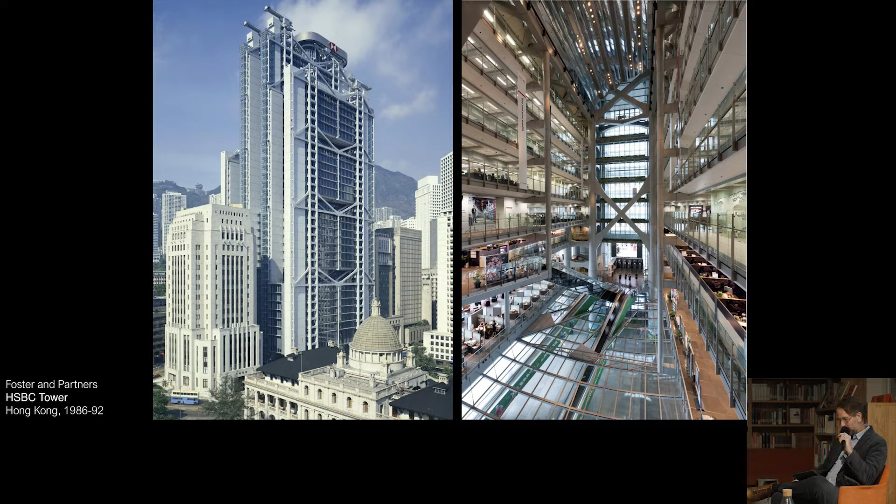I'm going to talk from a perspective that suggests that what we have come to call sustainable architecture, and this is my emblematic sustainable building, is now a thing of the past. A failed project that, much like the COP climate negotiations just concluded in Egypt, served to barely impact the rise of climate emissions. Since, as many of us know, sustainable or green architecture emerged in the 1980s, carbon emissions from buildings have of course continued to increase at a fast pace. Evidence that sustainability is not enough.

Or as Sarah El Battouty, an architect recently appointed as the UN's Race to Zero ambassador, noted yesterday in an interview relative to the COP conference, despite the good intentions of many architects, as she put it, quote, "Too often we create a silly building design and then put some solar panels on top and call it green architecture," unquote.

We know this general phenomenon, right? Another UN representative, the geoscientist Yamina Saheb, puts it a bit differently, as she wrote relative to a UN report from April, quote, "The building industry is lagging behind all other sectors. It hasn't modernized at all since the Second World War," unquote.

And what she means by modernized there is not our kind of architectural terms for modernity, but rather that we are still operating with a template of steel, concrete, and glass, and a sealed interior, as we'll talk about quite a bit today, that began to develop right after World War II. So that these design methods and material supply chains have become so deeply embedded in what we call architecture that it appears quite difficult to kind of move past them, right?

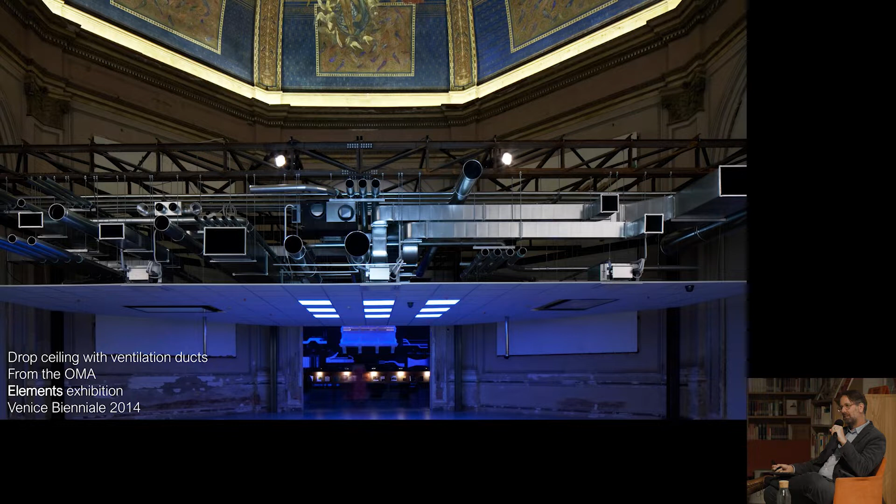So what I'm trying to start to put together is the terms and the concepts and the histories that can help us to construct this new vision or this alternate proposal for architecture that talks about sufficiency, that engages with some of these questions, and that thinks then about how to do more with less, right? Another way that the UN talks about sufficiency is with the phrase demand management, right? That we just don't need as much as we think we do. So these are all things to keep in mind. Air conditioning is at the center of this challenge.

Can you see the slides okay? The light isn't? Okay.

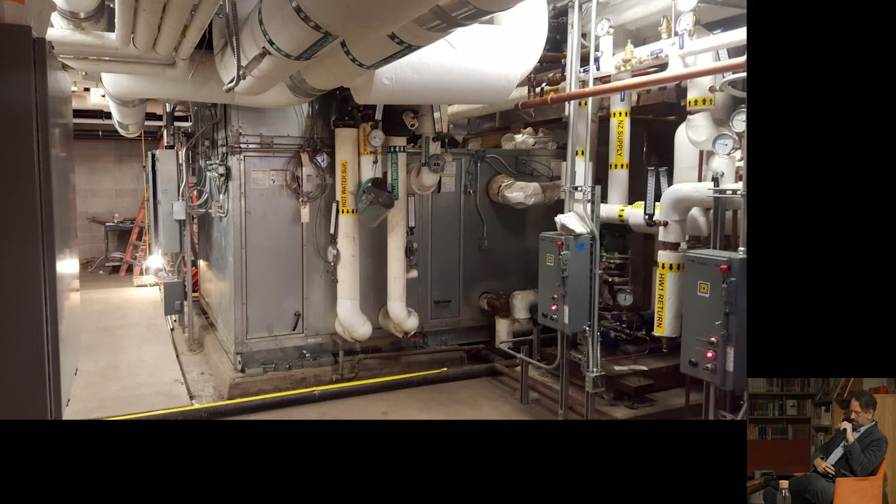Air conditioning is at the center of this challenge and of the transformation to come. Air conditioning, as the philosopher Peter Sloterdijk puts it, quote, in the literal sense, will establish itself as the main space political theme of the coming era, which is to say of our era today.

Air conditioning and HVAC, heating, ventilation, and air conditioning more generally, has been a primary target of the efficiency trajectory. Through HVAC, we have filled our interiors with fossil fuels. Buildings have become systems for processing energy resources as those resources are drawn out of the soil, processed and burned to power mechanical conditioning systems.

And the supply chains and technological trajectories shepherded by HVAC, in particular the sealed high-rise office tower developed in the US in the 1950s and then of course spread widely around the world, and the mechanical provision of comfort on which it relies, has been this kind of template.

So in this sense, air conditioning has produced, or at least contributed to the production of, a world of comfort and consistency at great cost. The thermal comfort generated inside has, through the carbon emissions from these HVAC systems, degraded the prospects for life outside. And this is, again, just one of many possible examples. Of course, an important one to the history of the field.

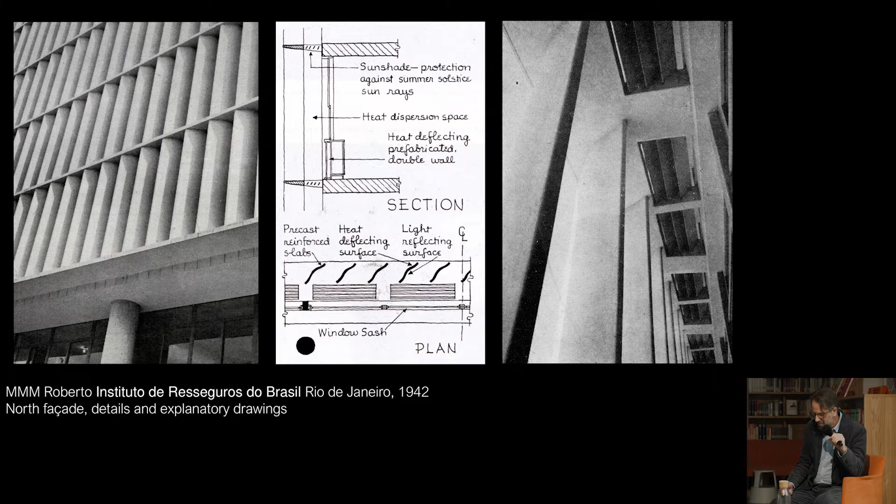The historian and curator Barry Bergdoll, in the context of the 2015 exhibition that he curated at New York's Museum of Modern Art called Latin America in Construction, wrote that the emergence of a distinctly South American modernism, and we'll see many more examples in a moment, involved projects and buildings that, quote, are not the belated reflections of examples set in Europe, but previsions of a modernization to come, end quote.

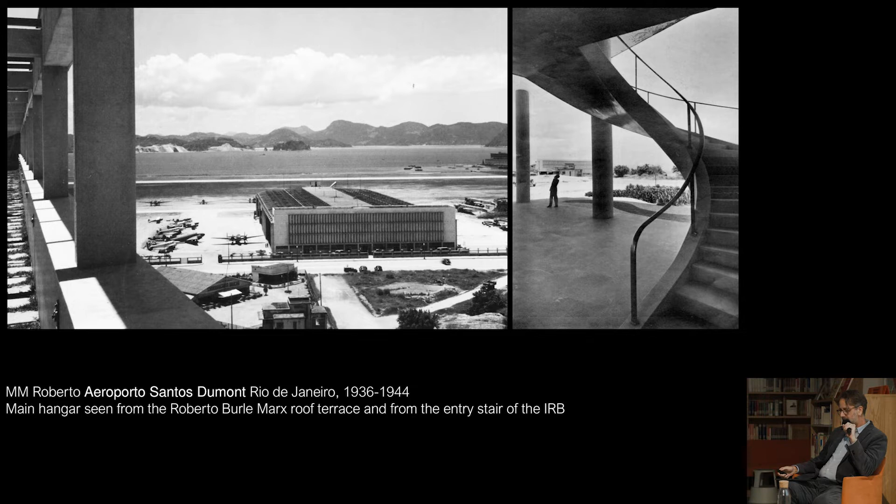A premise which, it is worth noting, and which Bergdoll himself notes, has been a part of Brazilian written histories for decades, which is to say, histories of modern architecture written in Brazil have noted the importance of Brazil as a site for the emergence of ideas rather than receiving them, let's say, from France. We'll get into that again in a second, too. Yet Bergdoll's precise articulation helps us tease something out here today. Brazil, again, was a site of emergence, of production, more than a site for reception of modern architectural ideas. The arrow of history moves from south to north, or at least is somewhat circular.

Also significant, this inversion of cause and effect places climate and the elaboration of design methods to manage the thermal interior as essential to narrative conceptions of the progressive development of modernism, right? So when we place Brazil as a kind of originary space rather than a receptive space, these questions of climate become more essential. We could draw this notion of architecture as a practice for climatic adaptability back to the heart of the matter, so to speak, the heart of the history of modern architecture, to provisionally reclaim Le Corbusier on these terms.

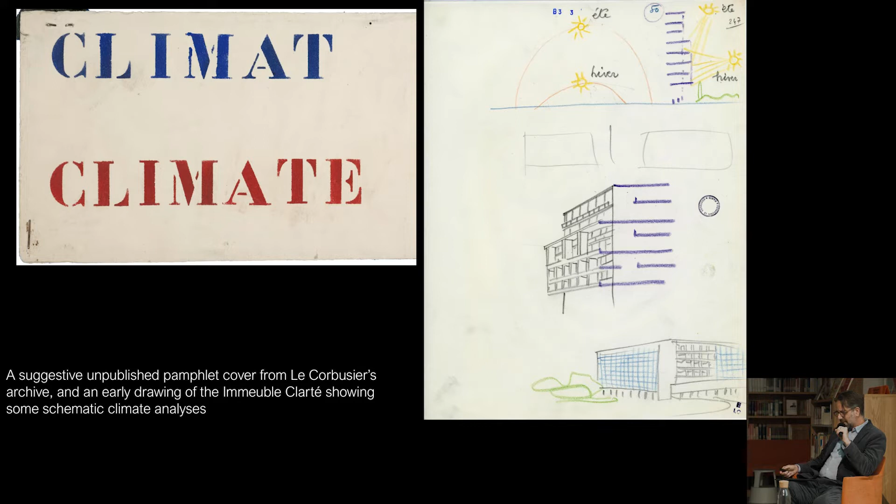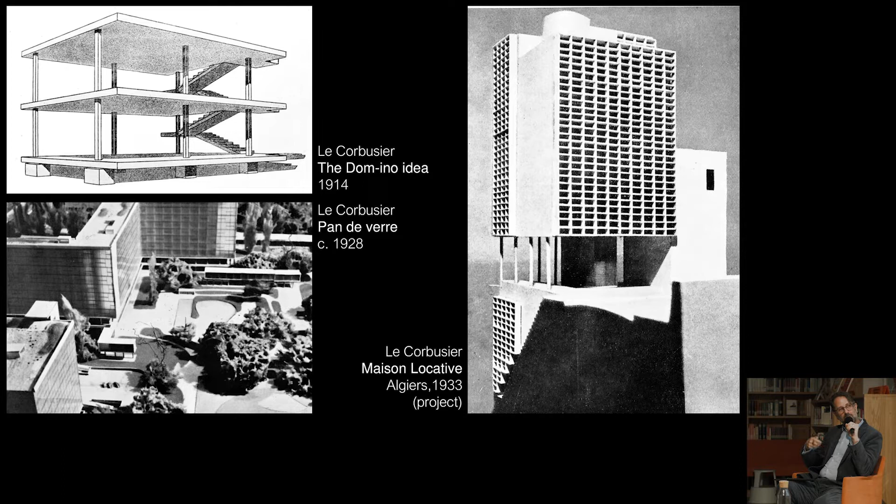In the Barcelona example, banks of operable shading louvers sit on the facade of compact townhouses. The sectional drawing on the left suggests a different sort of originary moment of modern architecture, not so much a template to be followed as one that was itself received, influenced by experiments in Brazil and elsewhere. The louver system that we see in this later model, a model built for an exhibition in 2002, we see in this drawing from 1933 represented as having these different states of rest.

Right now, this seems like a kind of silly thing to focus on, right? It's not that complicated, it's pretty straightforward, but it's this first moment of this kind of representation, right? A kind of mediatic event, if you will, a representation of the potential of this dynamic facade. I'm indicating perhaps that one of the projects of design was to produce a felicitous relationship to climate patterns.

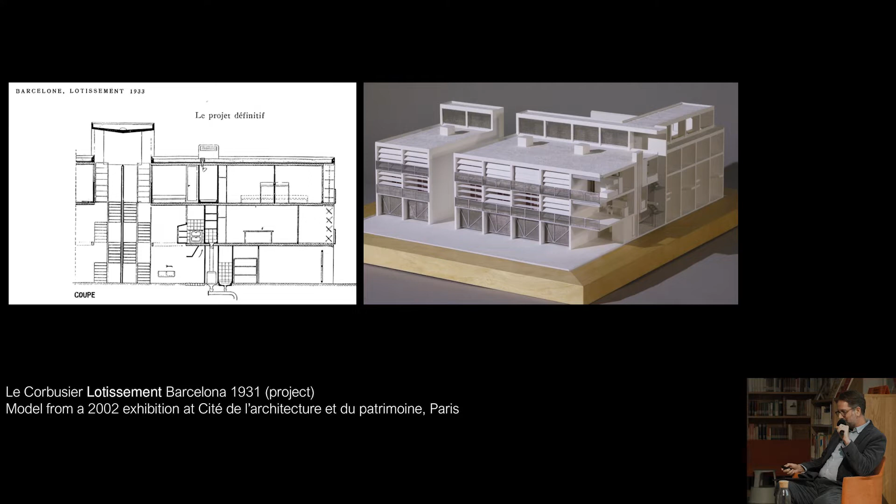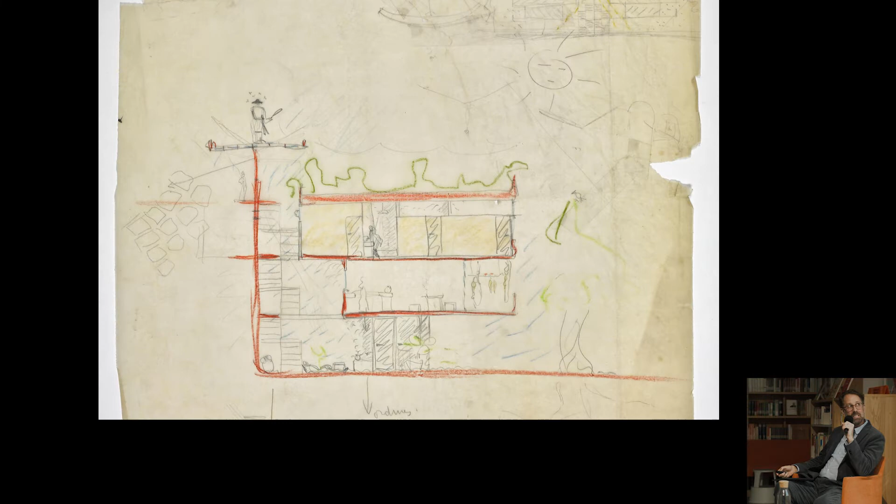We can also take a look for a second at this image, another drawing of the same project, right? We can see the same basic section, but drawn somewhat differently, which is interesting for us not only because it suggests the flow of air through the building, right? We see these blue lines. We now have all the red and blue and purple arrows, right? But this was just blue lines. So another kind of media event, an attempt to show how air moved through the building. And it has this slightly passive sun, right? Not quite sure what to make of that. It seems, I guess, resting.

But I think most importantly, this strange fellow here, right, who I was thinking was beekeeping for a while, but I think it's probably butterfly catching, right? So walking along the lantern roof of this building that also, as we note, has proposed a quite lively green facade, suggesting the important role of these speculative drawings, again, also of architectural media, in considering and previsioning, right, premediating, back to Grusin's term, future modes of life.

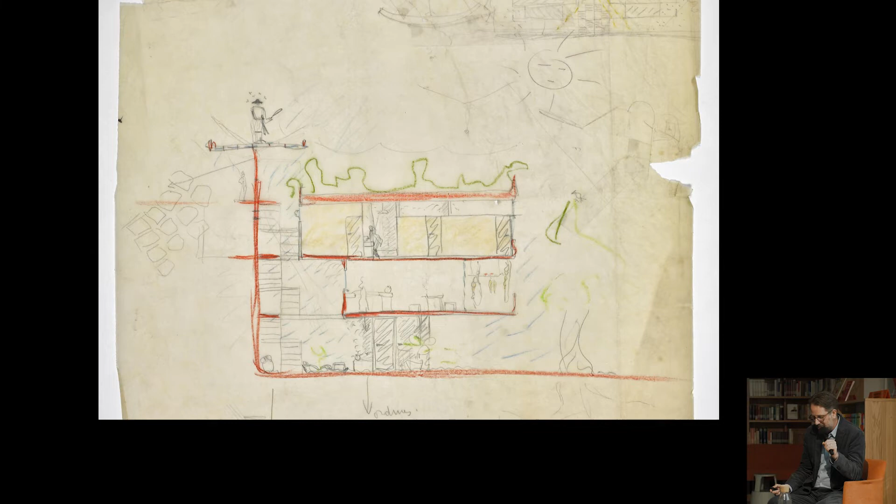Which is to say that l'esprit nouveau that underlay much of Le Corbusier's work in this period was a new spirit enacting a different relationship between society and nature, between inside and outside, with the dynamic shaded facade as an essential mediating system. So to jump back for a second to this slide, what might have looked like garages are in fact these indoor-outdoor spaces, much like the jardin suspendu that Corb would specify in other contexts, that allow for the street, replete with trees and plantings, to embody this novel social form, right, to be this new spirit.

In this sense, architecture was seen to have a capacity to reimagine, to re-script relationships between social practices and climate patterns, to be a modulating and mitigating device that provided a space of comfort.

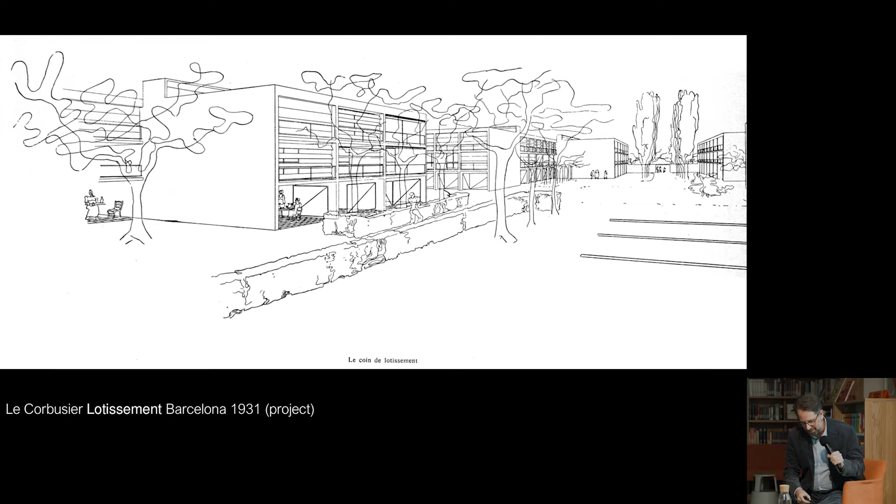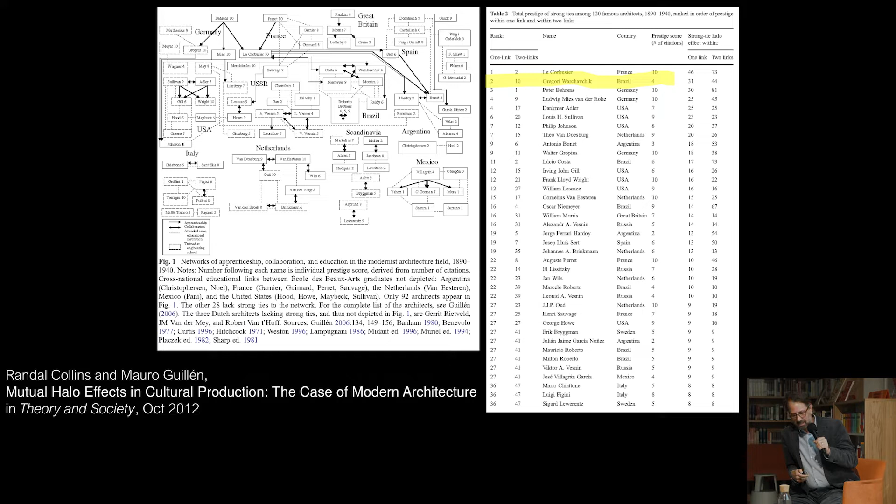Okay, I think I'm going to skip this next part, but it basically just shows that Georgi Warchavchik, who was a Ukrainian, Italian, Brazilian architect, right, as happens sometimes, was one of the most well-published in the period up until about 1940. This is his important house from 1927. Just a quick indication of the relative importance of Brazil to the broader sort of dissemination of modern architectural ideas that I'd be happy to get into some details, but I've already spent too much time on it.

Okay, so to continue our story in Brazil, the details of the siting and facade treatment of the IRB building in Rio were informed by a related effort towards increasing scientific knowledge of the Brazilian territory, especially its climate. The new National Institute of Technology examined climate patterns to consider their effects on the population. Buildings, again here, were an essential medium, right? The primary means through which emergent knowledge of the natural sciences, of meteorological systems, of climate patterns, buildings were the site where that knowledge could be applied, intended to improve social well-being.

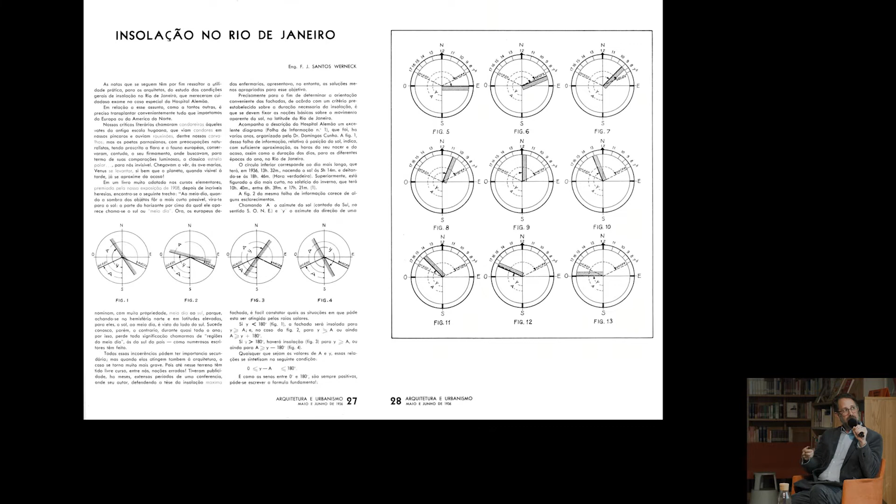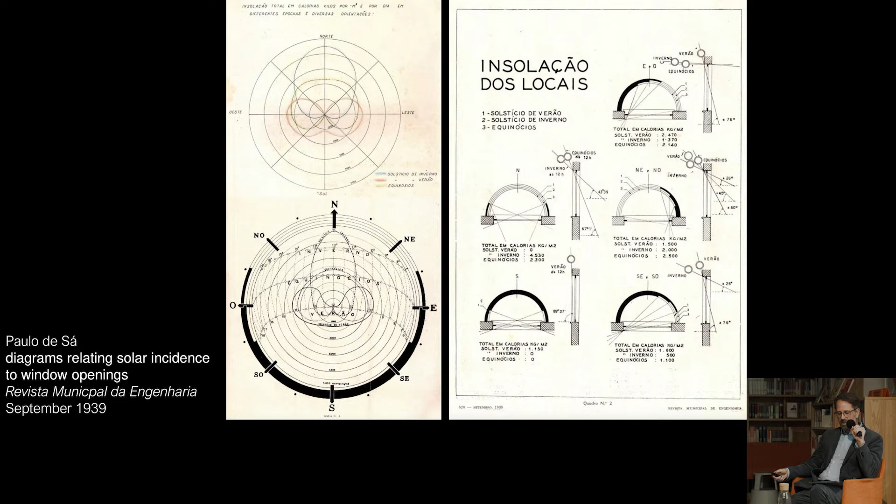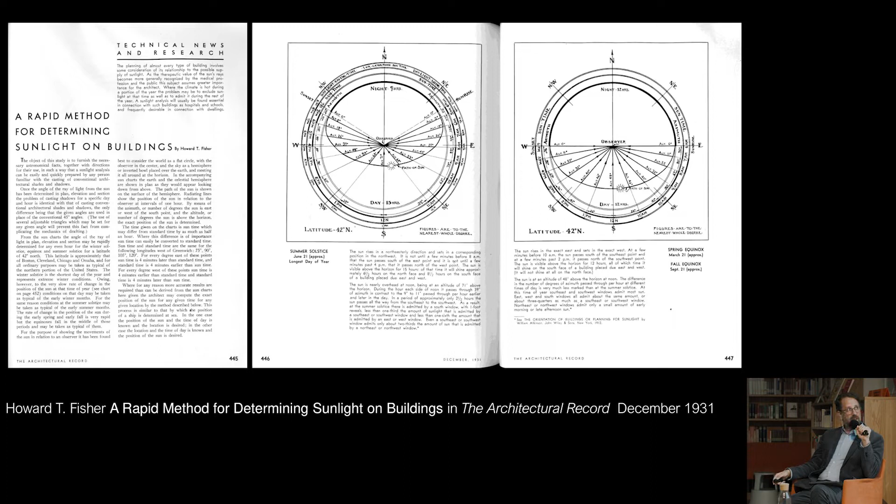This emergence, these types of drawings were not unique to Brazil, right? It's a really rich archive of drawings of these Brazilian engineers, but this was certainly not unique to Brazil. Here, a version from the American journal Architectural Record, where similar experiments were playing out at the Royal Institute of British Architects, at the Massachusetts Institute of Technology, and elsewhere, perhaps even here in Poland. Again, just some hints of how these experiments in Brazil resonated across and reflected discussions in the period, previsions again of a modernization already in development.

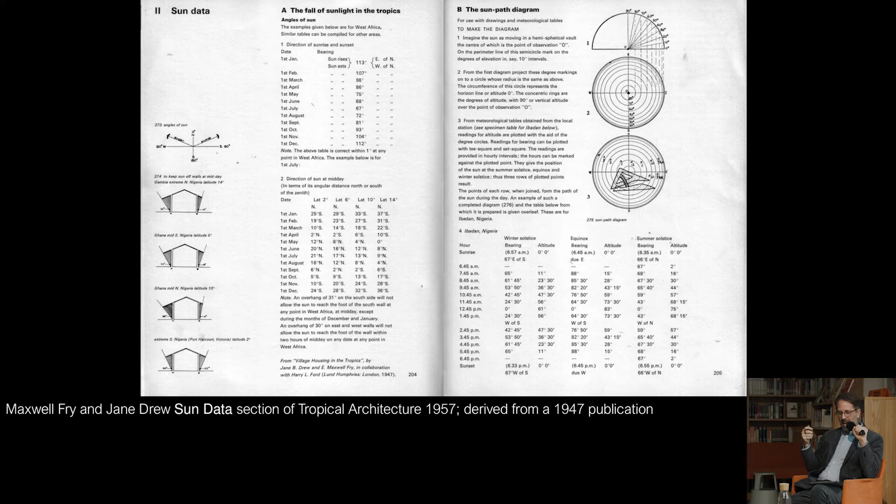Here, another version of solar analyses on the right, reproduced by Maxwell Fry and Jane Drew, opening towards images resonant with what the media theorist Vilém Flusser refers to as technical images, right? A type of media that is infused with new data and scientific approaches that is also caught up in ideas and new desires about how this knowledge influences the way that we live.

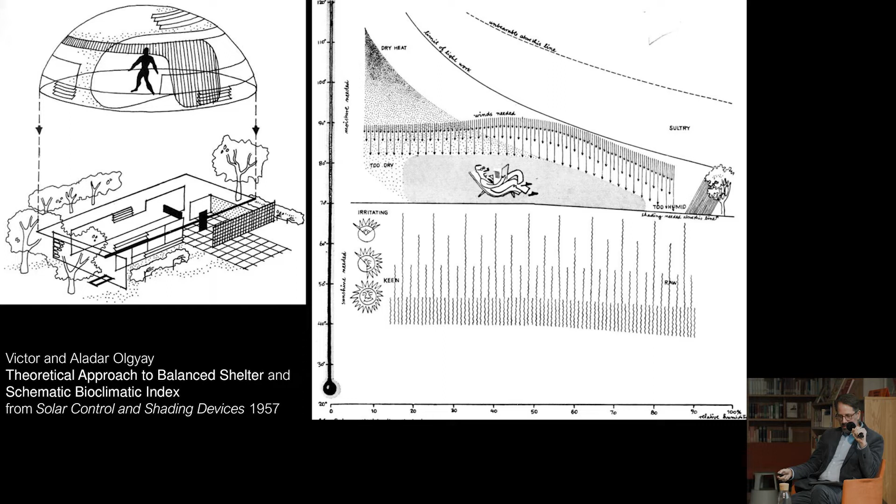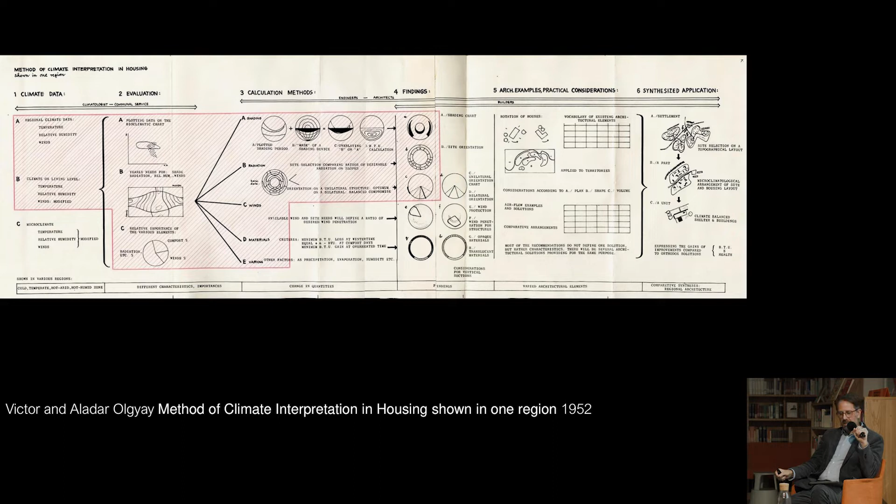In the book on which tonight's talk is based, I talk about their work at much greater length, pursuing the Olgyay brothers' elaboration of mid-century climate diagrams and their framework for climate modeling as a sort of precursor, a sort of just before digital version of climate management and performance techniques. And I'd be happy to provide details in questions.

Back to Brazil again, and to the IRB. Here we have another useful early example of a technical image infused with both data and desire. We looked before at the north facade. Here is an image of the south and east facade, with a diagram drawn by Milton Roberto to explain the architect's thinking. We can see in the photograph the general approach, alternating bands of glazing and concrete.

As Milton writes in this diagram here, the exterior walls could have been all glass, quote, very modern, of course, but due to sun and much light in Rio, and thanks indeed to the scientific computing done with data, end quote, so that's kind of the state of the discourse, by Paulo Sá, those images we just saw, the science basically said that it should be this sort of rectangular centered window shape, right? However, Milton Roberto continues, architecture culture suggested otherwise, as he writes, quote, everybody knows since Louis Sullivan that a horizontal window is preferred, the advantages of a window with full horizontal development, as he puts it. The results, he writes, come and take a look.

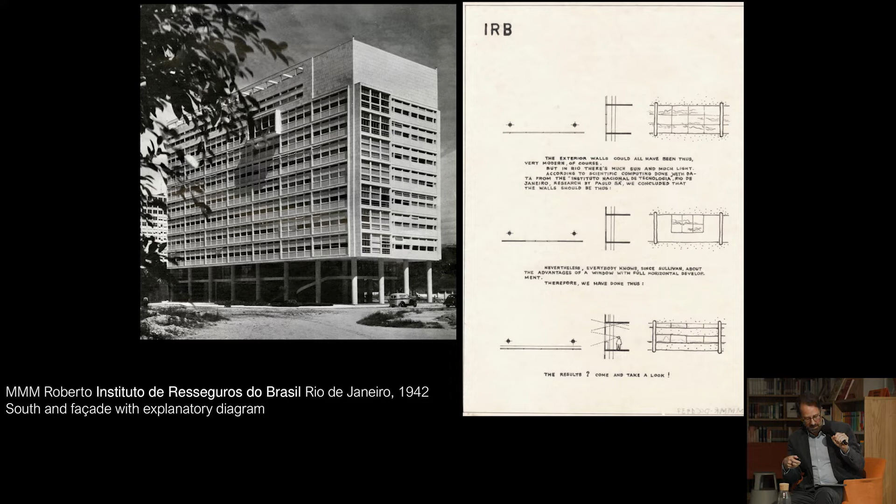Okay. So here the relative impact of this approach on the interior, aided by internal shades. Now, this artifact is on a continuum with some of those seemingly more technical images I've just clicked through. It is less an analytic image aiming to determine the ideal design according to climatic parameters, and more a sort of post hoc justification, right, intended for the client, for publication.

While a bit feeble as an argument for climatic modernity, it helps to clarify, I hope, that climate data was being brought into design methods on architectural terms, right? This is the kind of Louis Sullivan bit. As an intervention in form and facade design, as an aspect of discourse, as part of emergent and transforming architectural culture. So the social role of modern architecture was, at least in part, to adapt a building to this climatic condition.

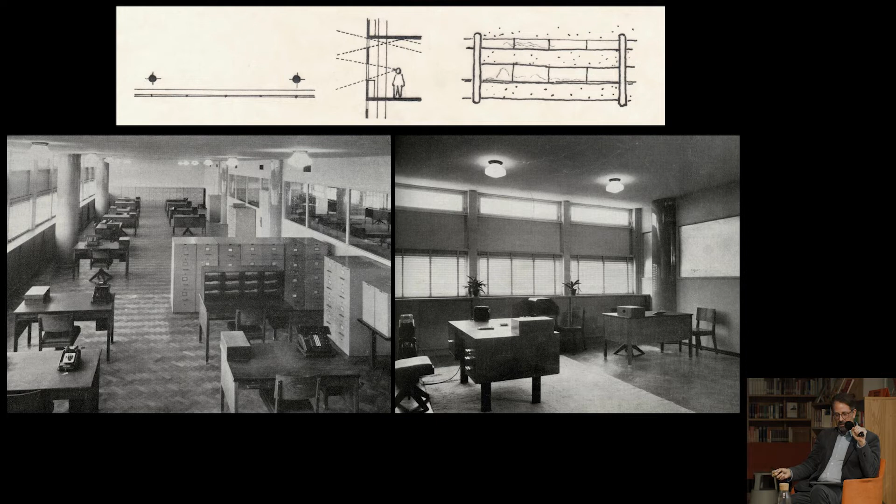From this foundation, we can start to take a look at the emergence of a certain sector of climate modernism, to start to build up the database, so to speak, the many different ways that facade treatments sought to alter the experience of the interior, to place the thermal interior in a different sort of relationship with the regional climate. A sense of the ways in which a certain type of design practice was deployed to adjust these relationships. Architecture, that is, again, as a means to sort of operate on this socio-ecological nexus.

One thing that some of you may have noticed in reference back to Le Corbusier's Barcelona project is that the shading devices at the IRB that we were looking at were fixed rather than dynamic, right? The same firm, the Roberto brothers, built this speculative office building, again intended for occupation by insurance agencies, seguradoras, right? It was called the Edificio Seguradoras, in downtown Rio a bit later in 1949.

An important piece of evidence, we can see the differently treated facades, right? The sun-exposed facade having this elaborate shading system. And on that facade, a few different systems for adjustment. We have this set of wood louvers that are adjusted by this mechanism here, shown again here in a different sort of state of rest, right? We have also these vertical, I'm sorry, these horizontal shading systems, and then also this capacity to ventilate some of the heat that might have otherwise collected below.

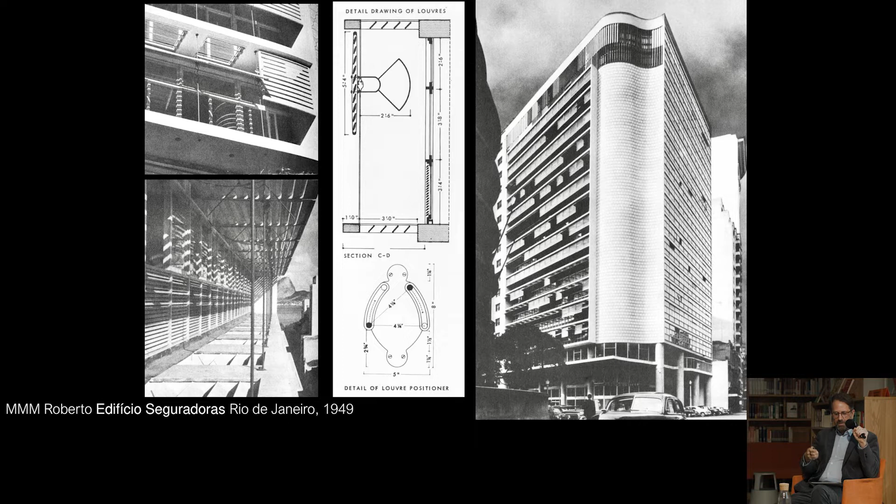Paulo Ribeiro's speculative office building in Salvador da Bahia, further north in Brazil, had a very simple system of 2 layers of wooden slatted screens, a movable horizontal version at the interior layer, and then a fixed vertical screen at the exterior, right? So you could sort of adjust the overall blocking out of radiation accordingly.

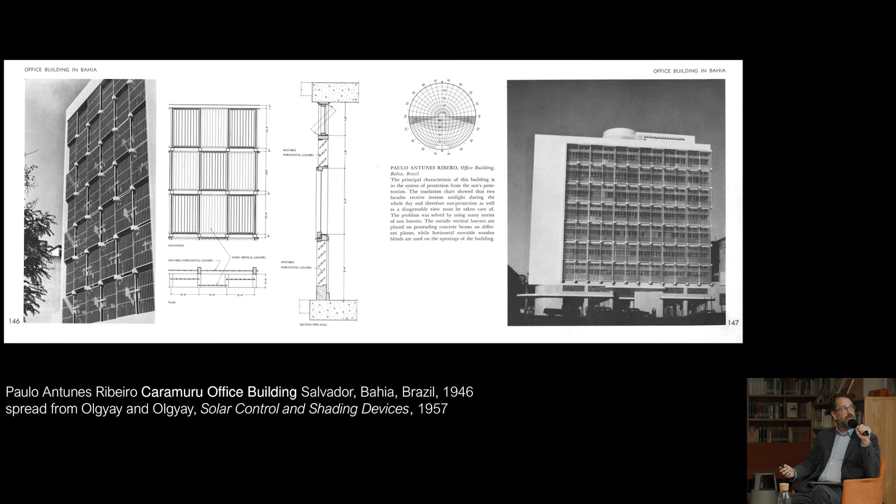Back in Rio, the Roberto brothers again designed this speculative office building on a relatively straightforward light metal shading system, easily manipulable as they're very directly demonstrating, right? So again, this kind of sense of here's how you do it, right? Come take a look. Again, we can note the importance of this image, right, and its claims to the progressive premise of their practice. An interesting note also, right, the kind of built condition that surrounds it, which was certainly of a very different period.

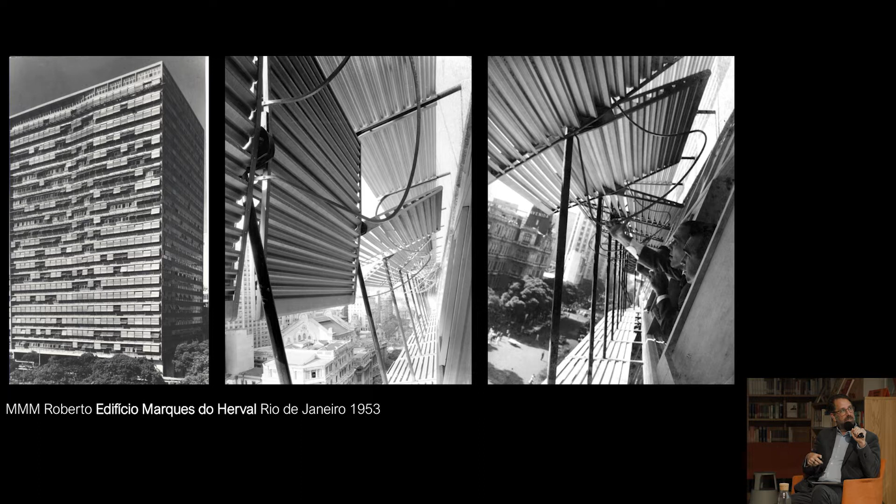Another Roberto brothers project that I'll spend a little time on in the conclusion, a small residential building on the then in development Copacabana Beach, built for their own occupation, the Edificio Mamãe, the building for my mother, so kind of before Venturi, right? Not that that really matters. The Edificio Mamãe, built on then in development Copacabana Beach, also clarifies an essential point, right?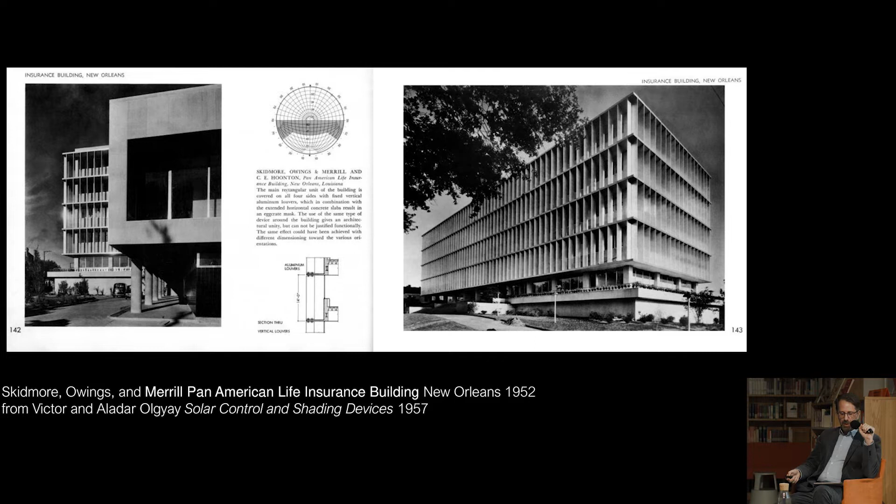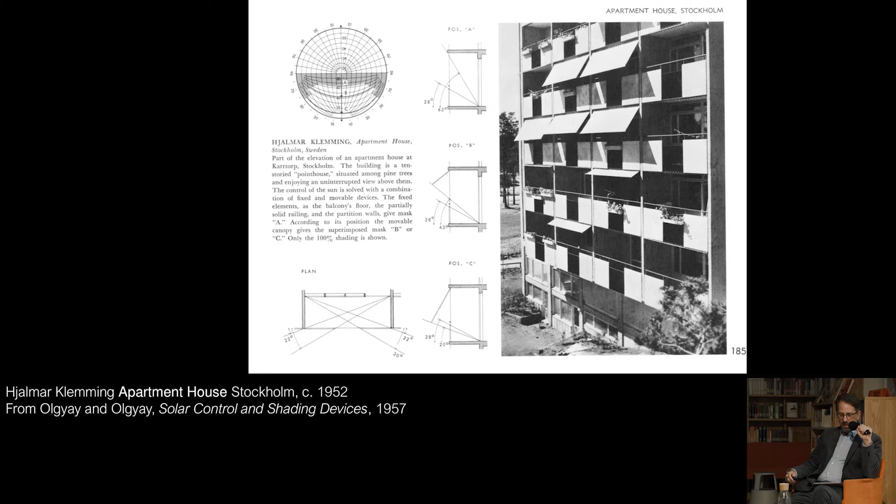There were many others with either fixed or dynamic shades in Brazil and elsewhere, built and unbuilt, suggesting a broad effort of architects, engineers, and others in a context both geopolitical and geophysical that led in this period to the globalization of the international style, right? Which is to say, modern architecture was able to become a global phenomenon by virtue of the shading device of the brise-soleil. Each building here not only brings its own set of design drivers, but also provides evidence of different aspects of climate knowledge and different socio-political contexts, as here this unbuilt headquarters for the Bahrain Petroleum Company.

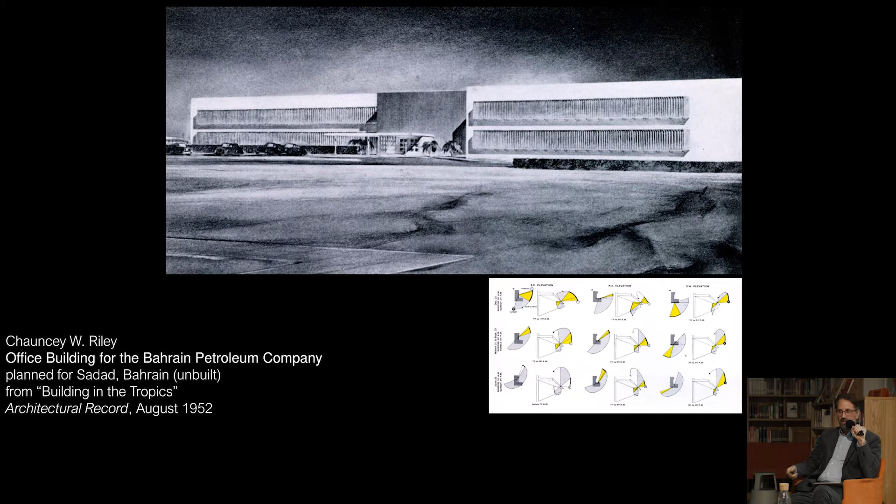Okay, and this is just a smidgen, a few examples of a very broad database, again, that's elaborated in the book that allows for us to get a sense of this broader array of climatic modernism. But one more Brazilian building, a better known example of architecture as a practice of climatic adaptability that allows me to clarify a few things and then move towards a concluding piece, right?

Likely the most famous of Brazilian shaded modernism is the Ministry of Education and Health, I assume known to some of you, if perhaps only from your survey courses in university. A building designed by Lúcio Costa with a young Oscar Niemeyer and a team of architects and engineers. I'm not going to get into the debates around whether Corb was involved, but we can talk about that at the end. He wasn't, basically, is the solution there.

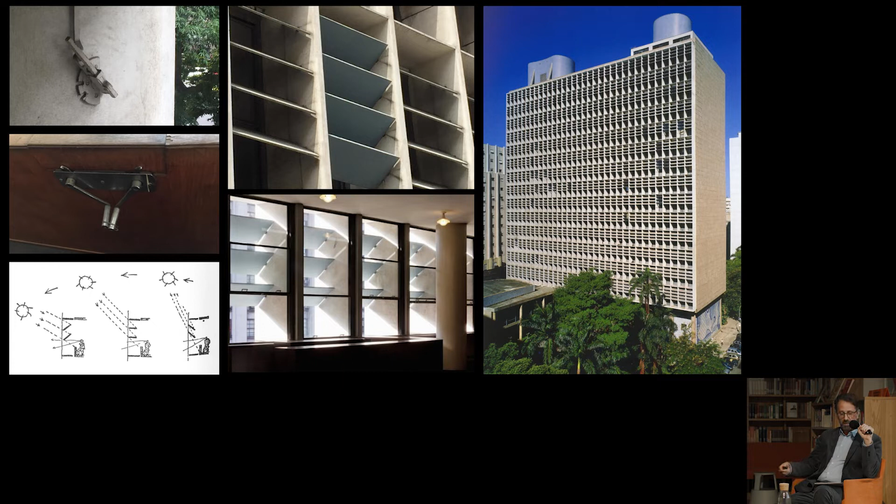The sun-exposed facade, again, the north facade in the global south, contains an egg crate system, each module filled with a bank of 4 adjustable louvers. We can see the louver adjustment system here on the left. It wasn't working when I visited in 2015, but it's since been repaired. And on the bottom left here, Costa's well-known technical image, right, showing how the louver system adjusted according to the daily path of the sun. And this was really more about daylight in many ways than thermal conditions, which this little dot here is the light going on, right? So this is part of this indication that at certain times of day you had to flip the switch, right?

But here's the important thing to note. The facade treatment of the ministry building was not only about shading per se, the direct daylighting and thermal effects on the interior, but also about the presentation of modernity, right? As Milton Roberto sketched it out relative to the IRB, come and take a look, right? Look at what we can do in this new context, a government building that sought to demonstrate on the facade for all to see the seemingly progressive economic and social principles of then President Getúlio Vargas's so-called Estado Novo.

I'm not going to get in today to some of the vagaries of that either, which is to say that this was, in fact, what was referred to as a benevolent dictatorship, right? A sort of authoritarian regime that sought to improve the well-being of the Brazilian population. But buildings such as this, this kind of facade demonstrating a certain type of modernity, were essential to the public relations of that regime. The Ministry of Education and Health was, in other words, both symbolic and material.

And we can then recast the insurance buildings and speculative office buildings we have reviewed as designs that saw in the climate dynamism of the facade an opportunity to intensify flows of capital, quite explicitly in many cases. Mechanisms of insurance, as we've seen, reinsurance, spaces for agents of global commerce, interior spaces conditioned, relatively, by non-mechanical means as part of a broader intensification and exploitation of resources and labor in Brazil.

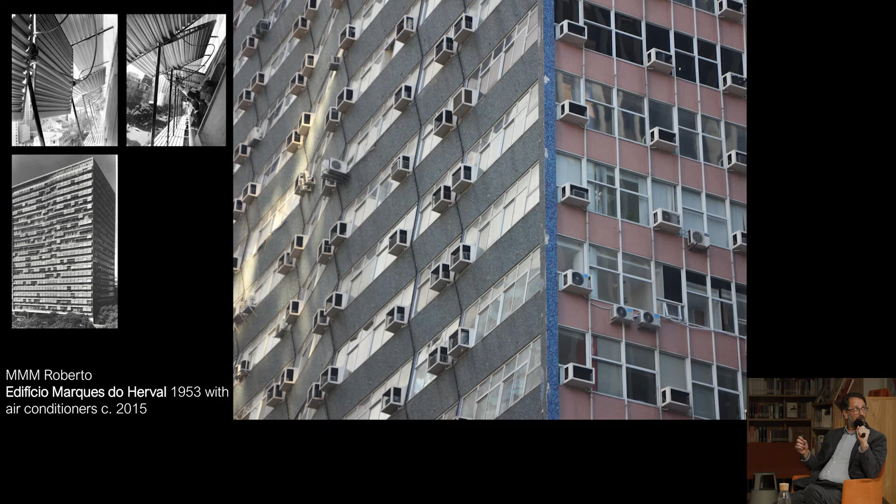Okay, so to return briefly to the comment from Barry Bergdoll, his suggestion that Brazilian experiments were not reflections of European models, but rather previsions of a modernization to come, we've seen this to be true in a few ways. In the dissemination of climate design strategies around the world, in the complications of architecture and neo-colonial corporate extractivism, in the dissemination of images and in the elaboration of specific techniques. But the modernization that came following these previsions, as we know, was not that of climatic design dynamism.

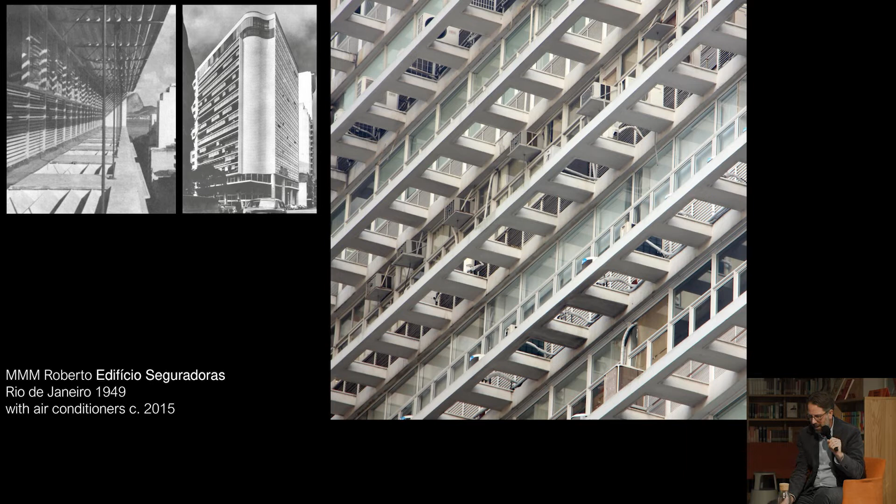Across the 1980s, many of the buildings in Rio, in Lagos, and elsewhere had their shading devices removed, replaced with carbon-costly in-window air conditioning units. And this one, in my mind, is the most atrocious: this delicate and very careful set of shading systems stripped away, but then served as the support system for coolers sitting on the ledge there. So almost in their face.

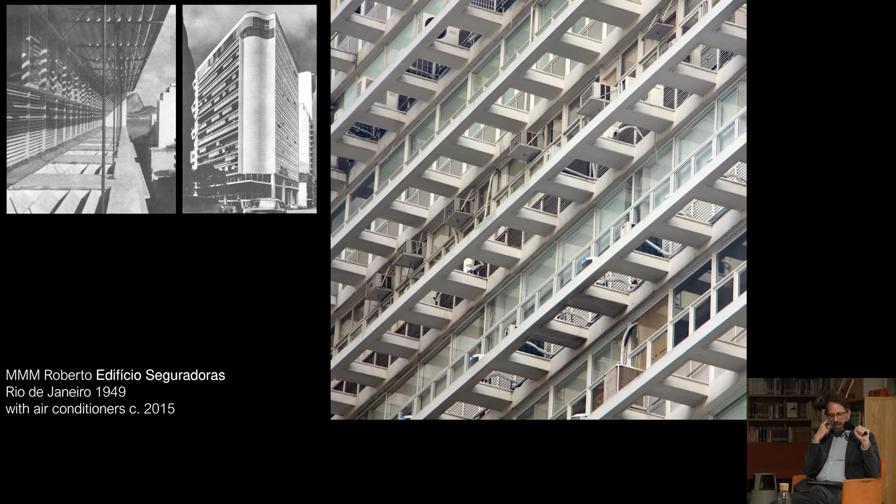So climate buildings, as much as any others, were part of this system. There's no outside to the global fossil fuel regime. And so what we see is that they pushed some of the edges and tried to produce alternatives, but often collapsed back into serving the purpose of their clients, of their inhabitants. All the same, having said all that, these thermal practices from the 1940s offer a potent recognition of the vagaries of historical change.

Evidence from a period just before air conditioning, in other words, can help us to think about architecture just after air conditioning, which is to say, today, hopefully. Especially insofar as these entanglements between climate and capital also emphasize the challenges of reducing carbon in a global economy that is still reliant on growth. We return to the premise of sufficiency, of demand management, of a framework for architecture that emphasizes the interconnection of design practice with climate governance and social habits.

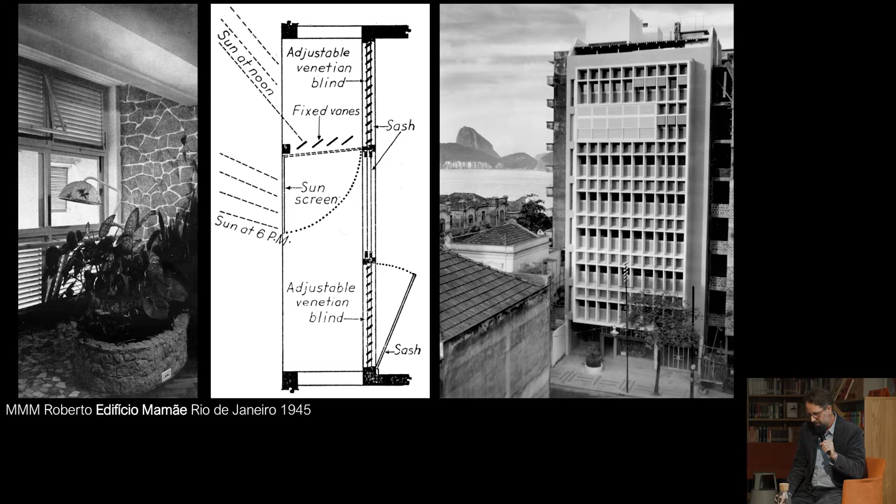This sort of form of embodied climatic engagement, right, that again we can think of in terms of this almost script or choreography that allows you to walk through the day and engage this facade on different terms. For contrast, we can place this project next to a contemporaneous one, the Equitable Insurance Building in Portland, Oregon, designed by Pietro Belluschi, completed in 1947, and generally regarded as the first curtain wall, fully sealed building. There's some debate, but we'll leave it at that.

The first building, that is, with a fully sealed facade such that an interior conditioning system was required for habitation, right? You couldn't open the window. You couldn't do anything else but adjust that HVAC system. The governance aspect at stake was the provision of as much energy as possible.

This building emerged in the Pacific Northwest, which is also the site of the Boeing airplane factory, basically, right? Energy systems had been ratcheted up for the war, mostly hydroelectric power, but also fossil fuels to feed the Boeing factory. And after the war, the question was, what do we do with all this energy? And Belluschi talks very explicitly about using the building as a solution to absorb some of that power, right? So this kind of governance provision that says use as much energy as possible.

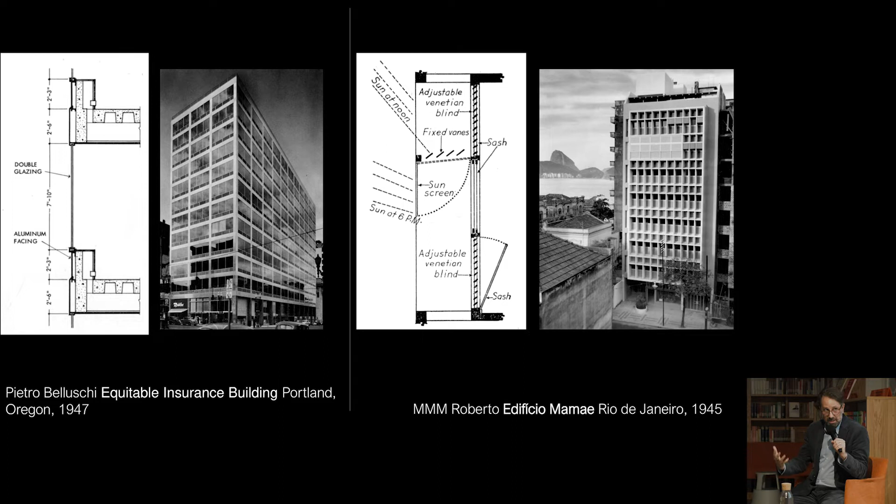And thereby how a practice of discomfort, which is what I'm calling this shift from this practice of comfort, its kind of inversion, might allow for a different set of causes and effects, might allow for a future that is, I mean, any future at all, on the one hand, or a future that can allow us to live at least relatively comfortably within these buildings.

So again, to sort of tie things up or maybe open them up to discussion this evening, I want to focus just for a second on this dynamic of comfort and discomfort and really the practice of discomfort, just a few more minutes. So comfort is not a universal value, right? It's an elite position, right?

It's an aspiration, it's a luxury commodity that emphasizes consistency, normalcy, and predictability, that allows for increased productivity or the pleasure of a good night's sleep. A collective allegiance to comfort is a form of self-assurance, right? That we're not threatened and that tomorrow will be like today.

Comfort is an indication, more broadly and socially, of having risen above the inconsistencies of the natural world, of having triumphed not only over nature itself and the weather, but over chance, right? Over the unpredictability or inconsistency of the outside world. We rely on this interior comfort. Indeed, that is one of its primary attributes, that it is reliable, right? That it's always there when we get back. We can adjust the dial accordingly.

But comfort is not universal, to repeat. It's a contingent thermal experience codified as a norm, right? Reified as a universal value. And those of you involved in this discussion in various ways probably know about this premise of adaptive comfort and many other theories and practices that are circulating on these terms.

Comfort has been integral to the designed interiors of over-industrialized countries. Indeed, it has been one of the projects of design to provide comfort. It's essential to the causal chain that weaves together mechanical heating, ventilation, and air conditioning systems, the fuels that feed them, and the carbon emissions that result. It is, in effect, what the silly buildings with solar panels, as with the quote that I started with, are trying to provide more efficiently. So when we turn the dial of a thermostat, we are exacerbating inequity, perpetuating violence.

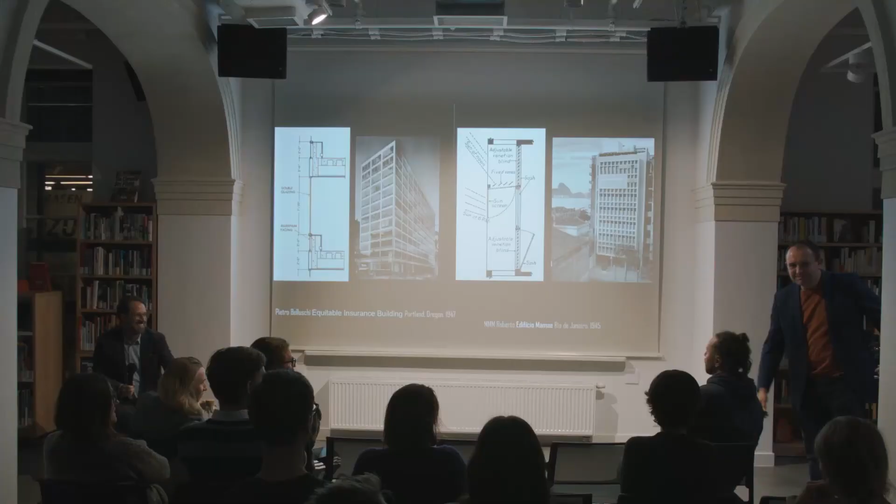At the beginning of the lecture, you showed us this, I believe you called it pencil tower. Yeah, this super tall. It's one of the few super pencil towers in New York, which are called together like Billionaires' Row or something, and they are top-notch technical wonders. And I'm thinking, are they equipped with something special for keeping temperature and things like that? Is there something special in them?

Indeed, and I wanted to spend the time clicking back to it because the image helps us to respond to that. These are very difficult projects, I think. Insofar as, as you suggested, there's about a dozen of them now, and they represent one of the horizons of architectural innovation, they're a big struggle for the field to overcome damage that's been done, for a number of reasons. I'll get to the specifics of your question in a second, but most of this building in particular is unoccupied, right? These are shell companies that have purchased these to basically launder money from all over the world. And it doesn't even try to work that well.